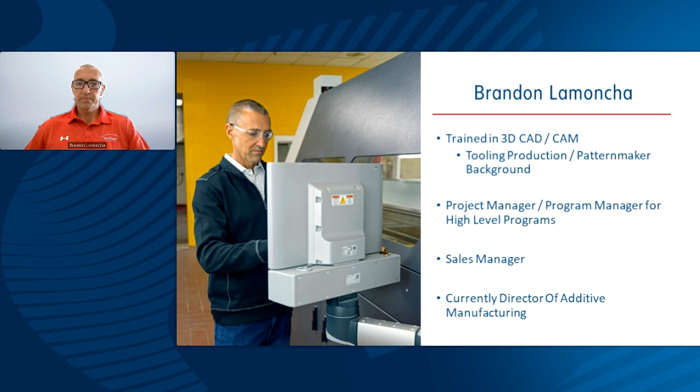Humtown, as she mentioned, is a third generation family-owned business. We started out in this building right down here that you see at the bottom of your screen. My grandfather was a pattern maker, and he started the company as a pattern shop, making patterns and core boxes for local foundries. Then we grew into a sand core and mold manufacturing company. We made sand cores and molds throughout the Midwest, shipping within a 400 or 500 mile radius, and we have done that for over 40 years now, becoming one of the lead core manufacturers in the Midwest.

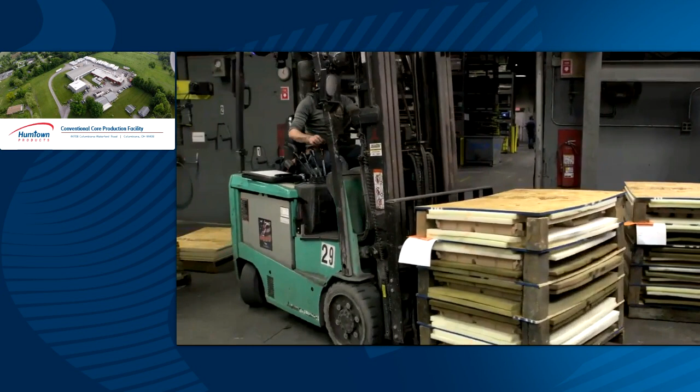That was a video of making traditional sand cores, leveraging tooling investments. At the time, we didn't know exactly where we were going to be going. So we started out using a Fortus 3D plastic printer for making tooling on some of our tools that had 4-axis and 5-axis loose pieces and more complicated geometries. We were using a 3D printer to make those instead of CNC cutting them. But what we quickly learned was that we were going to start seeing 3D sand printing become more and more prevalent in the industry.

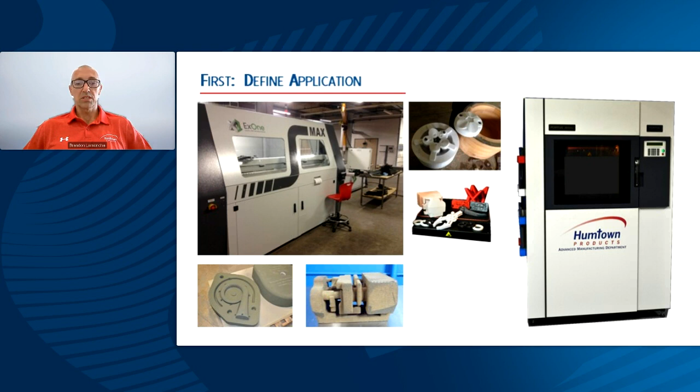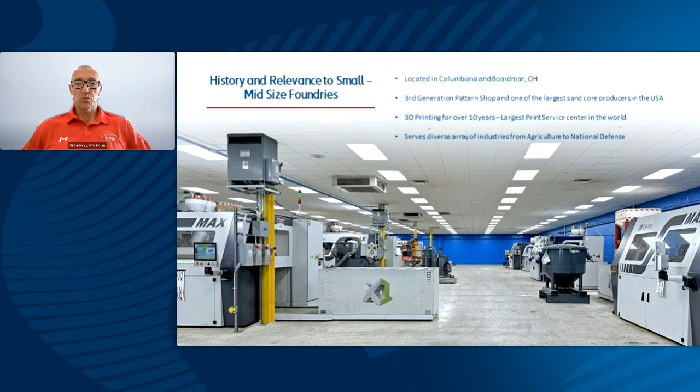We're going to talk about that today. As of right now, we're no longer making tooling at Humtown. We outsource that to other shops, and now our primary focus is 3D sand printing for molds and cores for the foundry industry. We have 2 locations, as I showed you. Our most recent acquisition of a building is for our 3D sand printers, and that's what we're going to talk about today. Like I said, we're a 3rd generation pattern shop turned into a core shop, and we're one of the largest 3D sand printers in the world.

I would be remiss if I didn't talk about the opportunity that we've had with America Makes. They really helped us jumpstart our getting our footing into additive manufacturing.

America Makes was launched back in 2012, 2013 in Youngstown, Ohio, and we had seen this technology being provided at Rapid and some of the other events, but we didn't know how to engage. The printers were very expensive, and there were only a few of them in the United States.

So we were very fortunate. We came up with a couple of project calls. The first one was the acceleration of the adoption of additive manufacturing for the foundry industry. We had great project partners like OEMs such as Caterpillar, universities such as Youngstown State and University of Northern Iowa, and even some of the machine manufacturers themselves. We were very fortunate to have America Makes right in our backyard, and it really gave us a leg up on getting into this technology.

Today, we're going to focus on binder jet. I'm sure a lot of you are very familiar with additive manufacturing and all the modalities and disciplines. Today, everything that we do at Humtown is the binder jet process.

We basically use a silica sand or a ceramic media coated with an activator. It's laid out, and the inkjet is applied by the print head. It's a 2-part chemical reaction, and we're going to see that in this video that I'm going to show right now. This is one of our larger format S-Max 3D printers in action.

It lays down the sand that's pre-activated, and then the binder is deposited with the inkjet printhead that you see now. That 2-part chemical reaction takes place, and within basically an hour of the job box being completed, it will come out. Then we start using a vacuum, and we're able to vacuum the loose powder, remove it, and take those cores and molds out and package them for shipment.

When we started in this venture, there were very few of these assets in the United States. Most of them, Ford Motor Company had 3 S15s. They were a captive shop doing development for Ford Motor Company. ExOne was the seller of the machines. They had a few machines available for a print service manufacturer, so they would produce parts for you, but there were only a very small number of printers available for that.

There was another pattern shop in Indiana, and Magellan Aerospace was another captive opportunity, and NAVSEA on the West Coast had one, which was also captive. So very, very few opportunities for companies like ours to engage with this technology, and that's why we were so fortunate to have America Makes.

They partnered us up with that program. We got involved with the University of Northern Iowa, and I spent many miles driving back and forth from Ohio to Iowa to work with Jerry Thiel and the university. We were able to learn about the printer. We were printing parts and providing printed parts to the industry to start telling everyone about this technology - how to use it, when to use it, where to use it, why to use it.

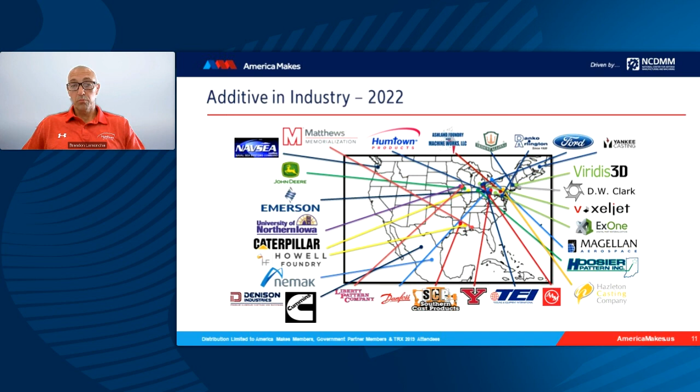We can get rid of backdraft, undercuts, and draft. We don't need that anymore because we're in a toolingless environment. So it's been very, very good for the industry, for OEMs to see the opportunity for this technology, and we're very proud to be one of the leaders in that space.

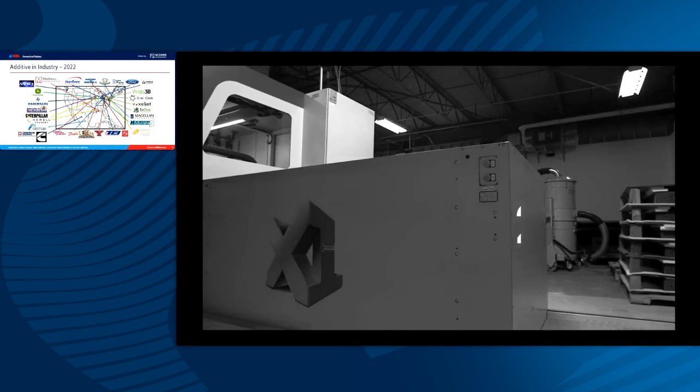This was our first facility back in 2016. We got our first machine in North America, at Humtown. We partnered with Youngstown State University to put this machine in. They didn't have the space for it, and they had a very large opportunity with America Makes. So we got together, installed the machine, operated it, managed it, and printed parts for the university and for projects for America Makes. It was very successful, and we were very honored to be part of that team.

It's been faster in some cases. We've had emergency situations come up where we were able to get castings very, very rapidly to the customer. So that's one of the main benefits.

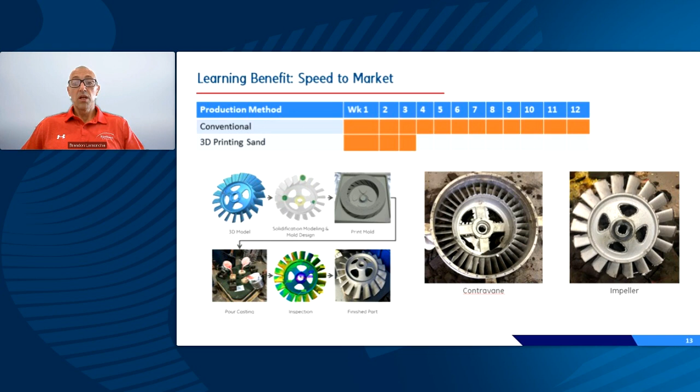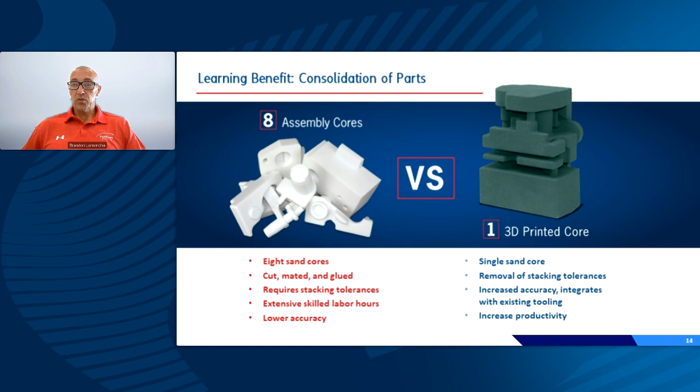A lot of people think that it is only for prototyping. This technology is, and it is, a great tool for prototyping, but we're starting to see applications now going into full production, and we're going to talk a little bit about that. But I always like to have a few slides showing people size.

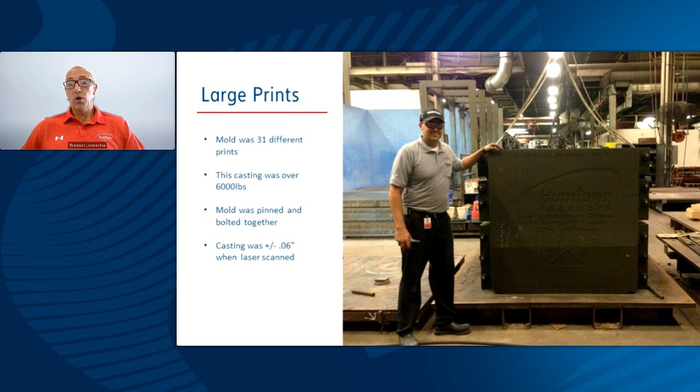This was a 6,000 pound casting that we did at Caterpillar, Mapleton, an iron casting. They saved - this was a great example of where they didn't have to purchase tooling. And sometimes production is only a few pieces. On some of this legacy equipment, you have cats and dogs, where they lost the tooling or they just need one replacement part. So sometimes it is still used for new product, prototyping, or legacy parts. So we don't want to discredit the technology from that.

Another way is we're seeing some of these really complex tools that need to be eliminated, and we've literally thrown them away because 3D printing the core gets basically a uniformly dense product, whereas before, when we had to try to blow these cores, we weren't able to get a uniformly dense part because you're trying to take sand with a binder in it, put air pressure to that, fluidize it, and fill a cavity. It was very, very difficult. So by using 3D printing, this was a legacy aircraft product that we've now in production, low volume production, but we literally threw the tool away, and we now produce the parts using additive manufacturing.

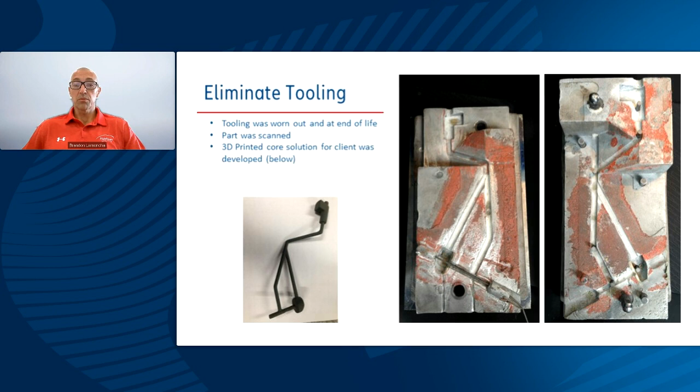We do a lot of hybrid projects, and this is where we're starting to see - we have some turbo housings we're doing now that are 70,80,000 EAU. Some of these cores used to be made in halves and glued together to get the geometry for this turbo, for the volute. Now with 3D printing, we're able to print that all as one piece. We don't have to have any draft, we're not worried about undercuts and backdraft areas, so we can achieve the performance that was intended without having to sacrifice the tooling design.

What we do is we don't have to 3D print the entire mold and core package. We're literally just printing the core with the complex internal shape, and the outer shape, that's very simple and not a very complex geometry. We're still making a tool for that. So this, when we talk to OEMs and to foundries, we find this is the lowest hanging fruit.

When you have a complex internal passageway that needs a core, we're using 3D printing, and then we're still making a tool and using their molding line. So whether they have a Hunter, a Sinto, a DISA, a high production foundry that's making 20, 30, 50, 100,000 pieces a year, they can still use 3D printing in production, but it's not a full 3D printed mold and core package. We're looking at these hybrid projects.

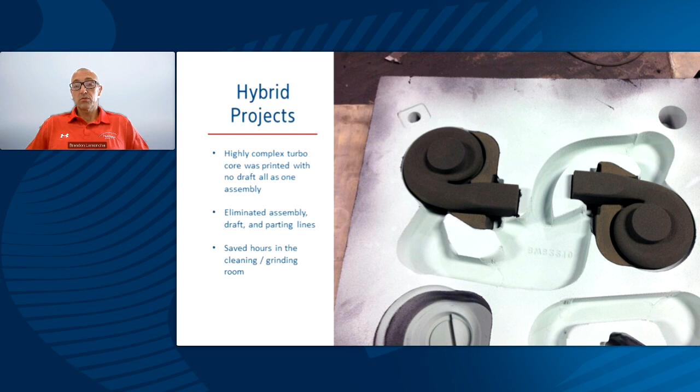So when you're talking to your foundries and looking at using additive manufacturing, be sure to talk to them about a hybrid approach, only using the complex internal cores, because that also keeps the costs down. A large mold like this could be hundreds or thousands of dollars, but a core package, if it fits in the size of your hand, very complex, that would have been multiple assembled cores. Now we're able to do that in a very cost-effective manner.

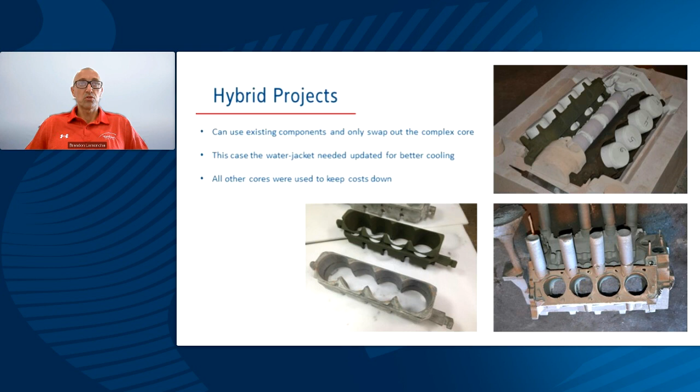So now we make all the other cores for this V8 engine block conventionally off of tooling, but the very complex core of the water jacket, with the very thin narrow passageways that were hard to get uniformly dense when we blew the core, we're now using a hybrid approach, using 3D printing for that application.

What we're seeing moving forward is we're starting to see complex cores that are only able to be printed. We have some customers where they were getting port-to-port variation. We've run projects where the intake and exhaust ports were moving in casting, so they were actually designing the ports where they were in a fixed location, and that way we were getting uniform wall thickness around the port, between the port and the water jacket. We're also able to do some venting and other really unique things using 3D printing to really push the boundaries of what sand casting can do in performance applications.

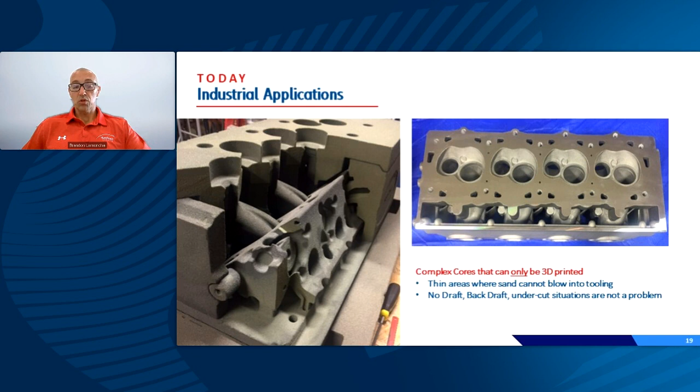So this is another great opportunity when you're talking to your casting providers: if you're looking for a highly complex design and you really need very tight tolerances, 3D printing a stable core package where the core is all one piece, a monolithic core, can really be the solution.

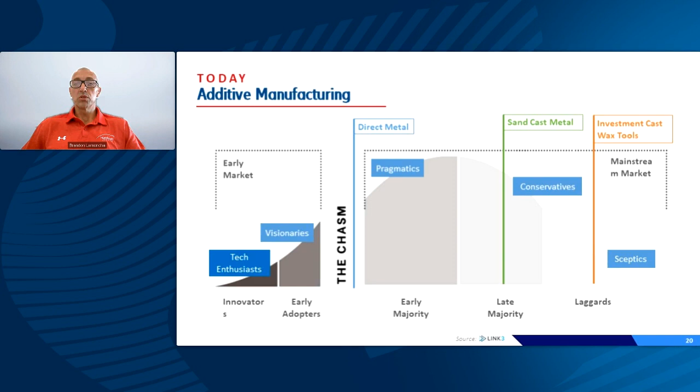So where are we at today in the sand cast metal part of additive manufacturing? We're really into the late majority. Investment casting and wax tools have always been a little bit ahead of the sand cast guys, but there is no more early adopters or early majority - we're now into the late majority. We've seen that with the graph I shown earlier about how many printers, with over 100 printers in North America, we're really starting to see widespread adoption using the applications as I mentioned, where they make sense: highly complex, consolidated cores, hybrid applications. Now that we've been able to educate the industry, we're starting to really see widespread adoption of additive.

We're starting to see this in OEM magazine - this is Casting Source magazine. This is the Mercury Verado 600 horsepower. This casting for the lower power steering housing is a 3D printed core. We produce 4,000 to 5,000 of these a year, and that was how this foundry was able to achieve this casting.

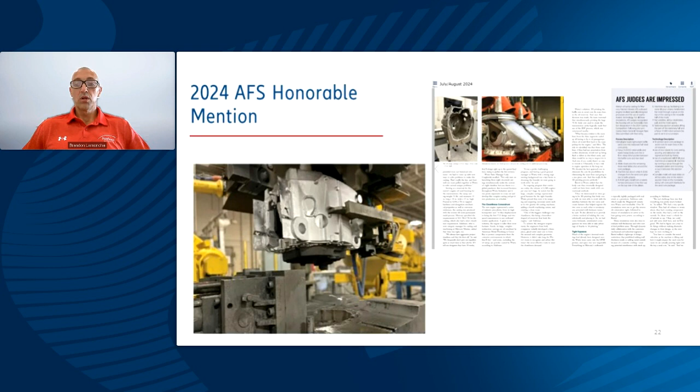So as I mentioned, they're not using a full 3D printed core package. We did prototype it that way, but in production they're using a semi-permanent mold process where they have a die, they're setting the core in place, pouring the aluminum, and they're yielding castings in production using 3D printed cores for that application. So as I mentioned, it's not just prototyping - we're starting to see full serial production of 3D printed cores to produce castings.

When I started in this industry, versus when my grandfather started, we've seen a steady decline in foundries in North America, which is very sad. It's been very difficult for OEMs because a lot of them are really struggling to get castings. We've seen that in my years at Humtown. But in the AFS, the American Foundry Society, we've seen a dramatic drop that is leveling off, and we're starting to see the value of foundry shipments going up. We're starting to see foundries come into a niche of what product they make, and they're becoming very good at that product.

So there is hope. A lot of foundries are becoming more technologically advanced, adding simulation software and internal design teams that provide molds and core packages to Hometown ready to print. That means they've taken into account all their clearances, for wash or chills or anything. They're designing this in-house rather than outsourcing to a pattern shop or even to us. We're starting to see more foundries hire engineers to make these core and mold packages for complex castings. So we're very excited to see that.

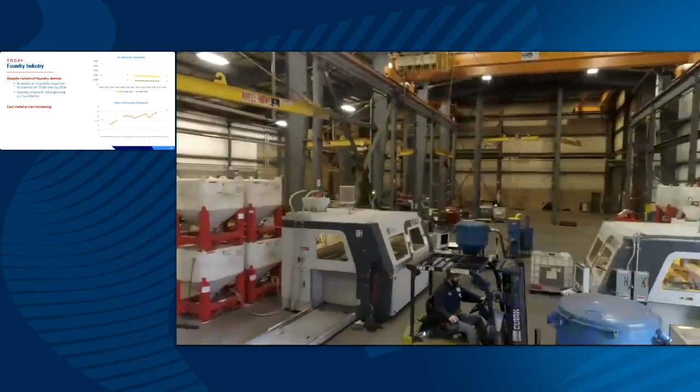So, a little bit more about Hometown. Here's another video as we've grown. In 2019, we got a new facility and put in our second 3D sand printer. We moved into this facility and leased this space because as we were growing, we didn't know how much space we'd need. This is what a 3D sand printing facility looked like in 2019 at Humtown - lots of room for the cores as they were being cleaned, packaged, and for raw material storage.

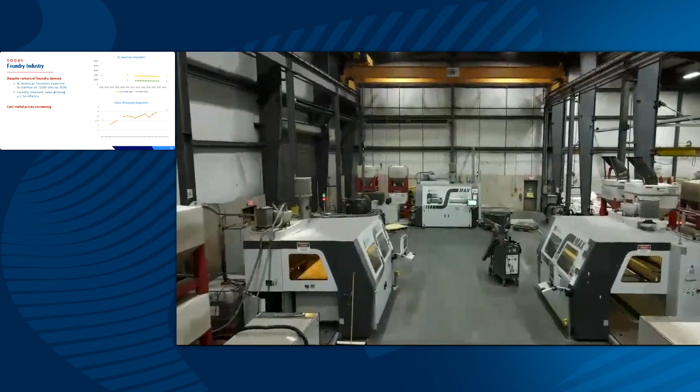In just 2 or 3 short years, we'd pretty much already outgrown that facility. At the time this video was shot in 2022, I think we had over 10 machines in that area. So we saw rapid explosive growth of this technology in the industry, and we've continued to see this growth.

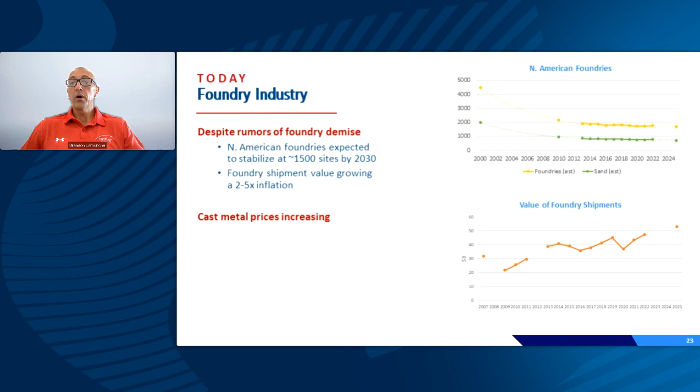Not only us, but we've also seen more competition enter the marketplace, which is good, because foundries and OEMs are starting to believe more in this technology as there's a robust supply chain. If Hometown was the only supplier and there was no other way for foundries to get cores and molds, they'd be a little more apprehensive. But now there's a robust supply chain, multiple printers in the market, and multiple print service providers as well as foundries putting in their own printers. The OEMs are starting to have more of a demand pull rather than me having to be a supplier push into the industry. So we're very excited about that.

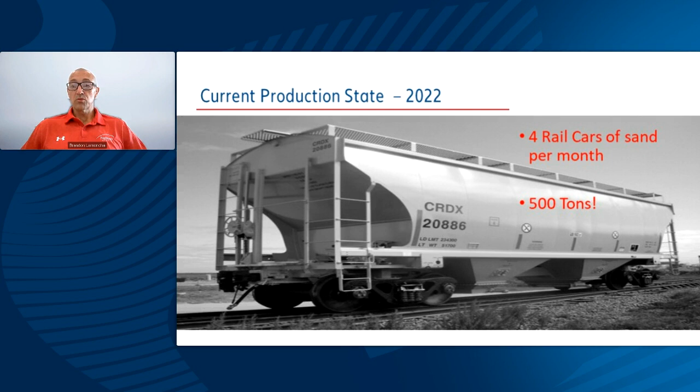In 2022, it's been pretty much the same the last couple years, but we were going through 4 rail cars of sand per month, which is 500 tons of sand. So we're not buying little containers of powder or filament rolls - we're literally buying our material by the rail car. So it really speaks volumes to the amount of production we're doing in this technology.

We've recently, just this past year, moved into a facility that we purchased. So we're very excited about that. We can house up to about 15 machines. We have 12 in this building now.

We realized that after this growth, we'll probably need to become a little more regional because we're shipping coast to coast. We ship to Mexico almost every week or every other week, and to Canada every week. So we've realized that this is about as large as we'll probably grow - 15 machines or so here in Northeast Ohio - and then we'll need to set up operations in other parts of the country and the world.

We have a partner in Europe we're working with right now. We're getting our first machine set up over there. They're already doing some printing for us in Europe, which is very exciting. For a small family-owned business, to see global expansion and customers around the globe is really, really exciting for us.

And for the OEMs that we serve, we have hundreds of NDAs with pretty much every leading OEM in the country that uses sand castings. We have a direct relationship with them at some level. And it's very exciting for me to be able to work with leaders in all of those areas as we push castings into the next level.

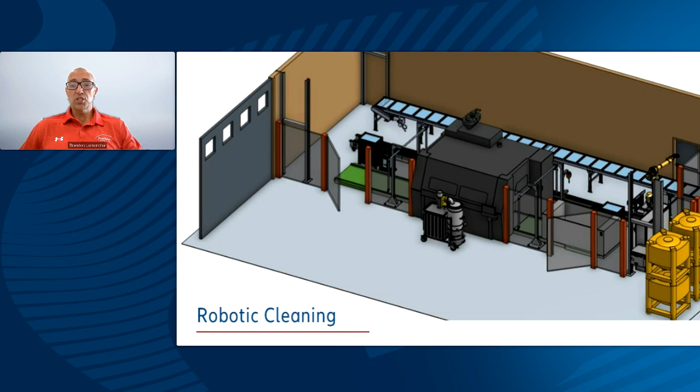So the future for Hometown - what are some things moving forward? Before we moved out of the other facility, we had done a project into robotics. This is for robotic extraction with vision technology.

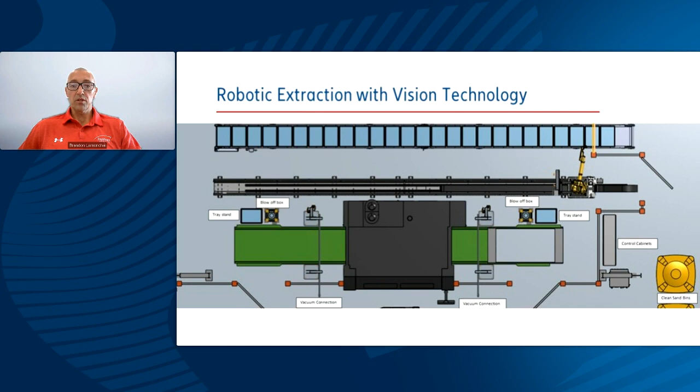So we're very excited to utilize robotics for some of the jobs that, to be quite honest, people don't want. We can get thousands of tiny sand cores into these 3D printers. One of the things we're looking at doing is, we had this cell in and ran off, and now we're moving the equipment into our new facility, so it'll be up and running shortly.

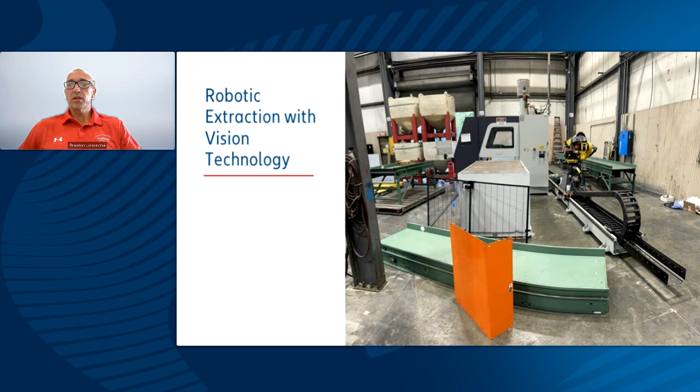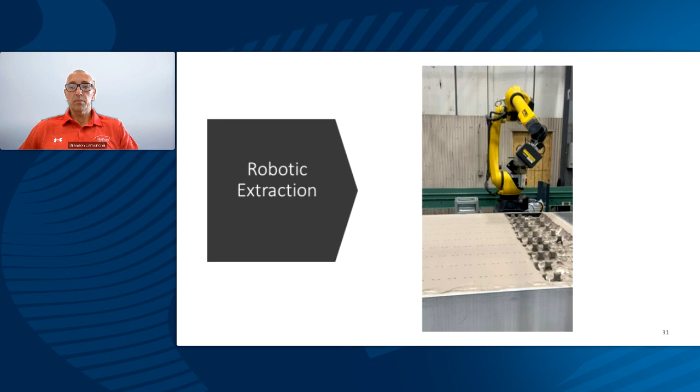But robotic vacuuming and extraction, what does that look like for Humtown? It allows our people to be working on the final packaging and other aspects. We're very excited to get this back up and running in our other facility, because as we grow into production, there's going to be more and more need for robotic extraction and handling of these parts.

So this is going with the robot grabbing one, taking it out. Go, Sandy.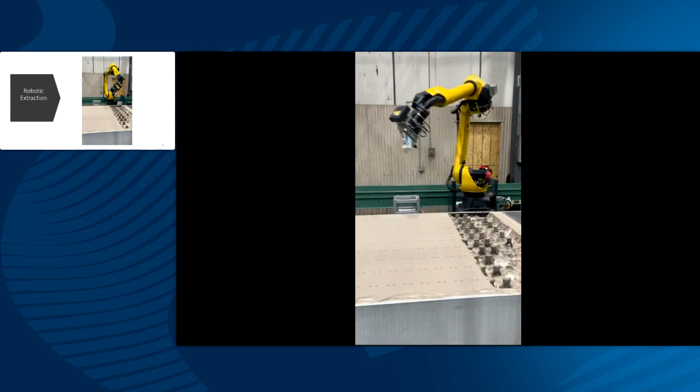I've also looked at CT scanning. We have some complex assemblies where it's very difficult to ensure there aren't blind pockets. We can print stuff, but that doesn't mean we can clean it. So sometimes on these internal cavities, when we have to depowder them, we have some methods and ways, but we also have to inspect and make sure that we did get it clean.

So I've actually flown parts out to California. We have some other CT companies in New York we've sent parts to, and we've put the sand core into the CT and scanned it, and it does a color map overlay of the internals to make sure there isn't any fugitive sand in there.

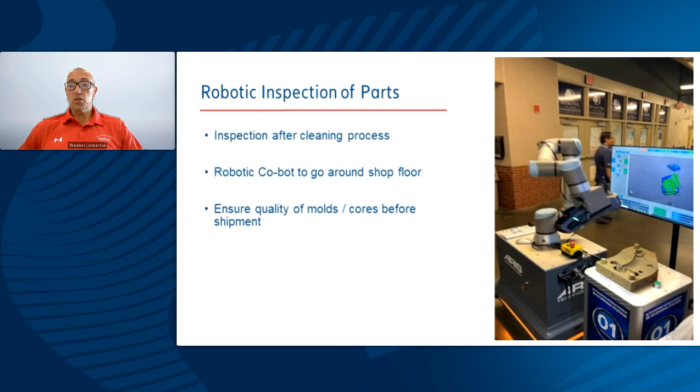So we haven't had any jobs that we've had to do that in production yet. We've bid several jobs and quoted that. So it really is something we're looking at, because we know we have to produce a part that's going to make a good casting for our foundry partner.

And as I mentioned, we do not cast metal at Hometown because we'd be competing with a lot of our customers. So one of the things I'm always excited to see is what does the foundry of the future look like? If you've been to Brembo and some of these large brake rotor companies, you see them pumping out millions of brake rotors a week. It's incredible - there's almost no faster way to make a near net metal shape than a casting.

So I totally am a believer that metal casting isn't going anywhere for a long time, if ever. Traditional patterns will always need to be there. I showed you some of the opportunities for a hybrid where we're going to use a traditional pattern - we're going to have that in the foundry, but we're going to have a digital inventory of these complex internal cores, where it may have taken 8 or 10 core boxes and a crew of assembly people to put those together. But those are going to be introduced together at the foundry now to yield that casting.

But I'm also looking at the future and seeing there's a lot of great technology for direct metal printed parts. I've been an advocate to foundries to look at that as an opportunity, not a threat, and say, hey, you already have a lot of the metallurgists, a lot of the team members in your facility that understand metal better than anyone. So why don't we look at that as an opportunity and look at direct metal printing, because you also have a lot of the inspection, the non-destructive testing, and a lot of the post-processing. Some foundries even have a machine shop for checking the metallurgical chemistry of the parts. So I've been an advocate of seeing, out of that digital inventory, some foundries may actually incorporate direct metal printing. And as a service provider for the metal casting industry, that's something we've looked at.

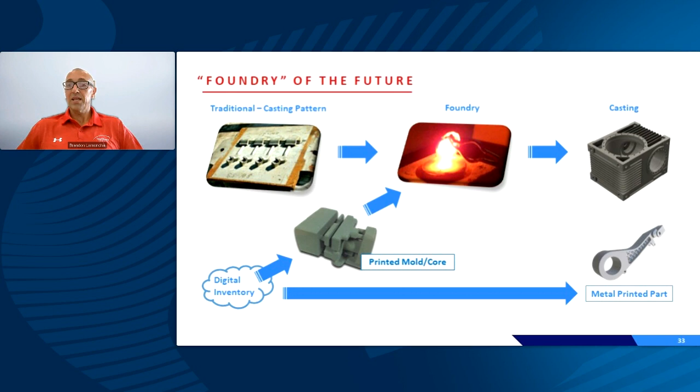So with that, I'm going to wrap up my presentation point, and I want to leave a lot of time for questions and answers, because I've seen a few pop in. I've been hard to read while presenting, but I want a lot of time for discussion and to get through questions. Thank you again so much for your time today. Take my email down, feel free to shoot me questions. It's been great to be here today and give a little insight on additive manufacturing and how it's not just for prototyping anymore.